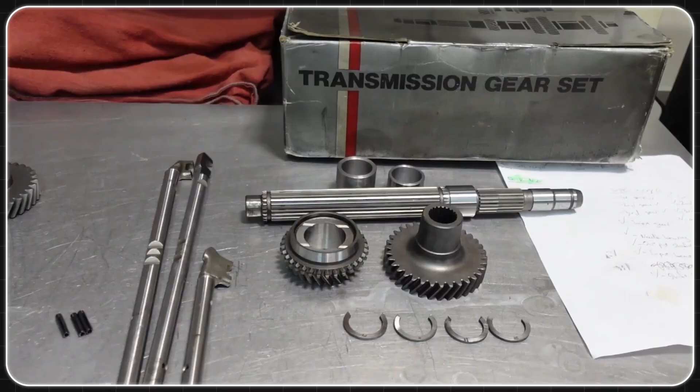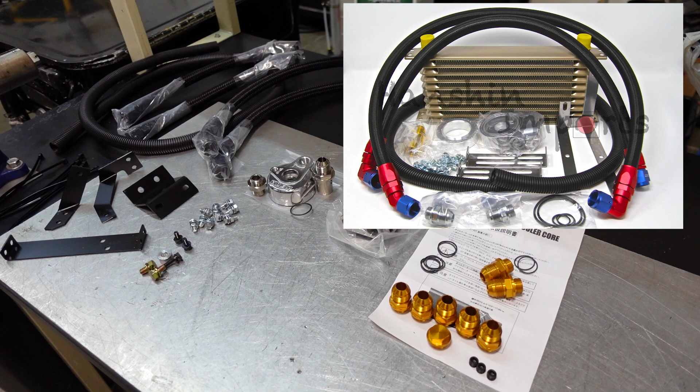Greddy oil cooler kit. This is an oil cooler and relocation kit. All the stuff that it comes with—I think it's only this and the HPI kit for the ECR33. This looks far more high quality. I think the ECR33 kit is not a relocation kit either, which you guys with RBs probably know.

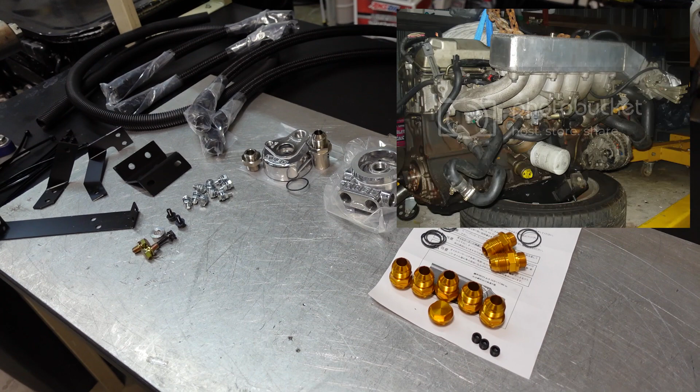25, 26, the oil filter is really terrible to get to and always makes a mess every time you take it off. Just some of the pieces.

I really would have liked to build a kit myself like I did for my AE86, but this is going to save a ton of time and money in the long run, with the R&D work all being done. Supposedly this should be drop-in, right?

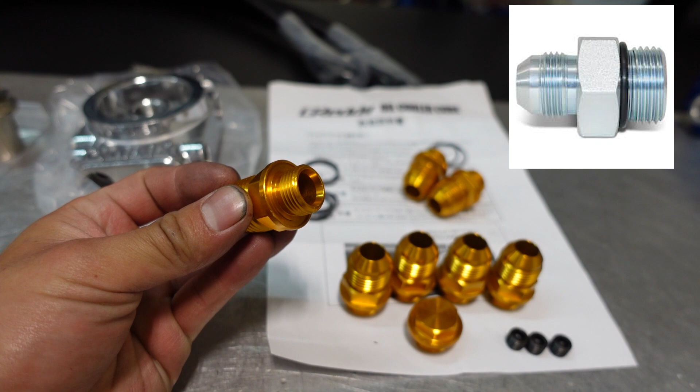Some of the reasons I wish I could have built this kit myself—I believe the fitment where they place the oil cooler core and the relocation stuff is pretty good, but I'm not 100% happy with these Greddy fittings. I wish these were just regular ORB fittings like we get in the US. I've had to replace these individually on customer cars, and it may be easier in Japan, but stateside these are not easy to get even from Greddy USA.

There's two 1/8 NPT fittings for sensor fittings on this guy, and one straight off of the block for another sensor fitting. In the future, I'm definitely going to run an oil temp sensor at least, off of the relocation. So I'm going to assemble a bunch of stuff, put all the fittings on, get this guy lubed and tightened up, and let's get this oil cooler on.

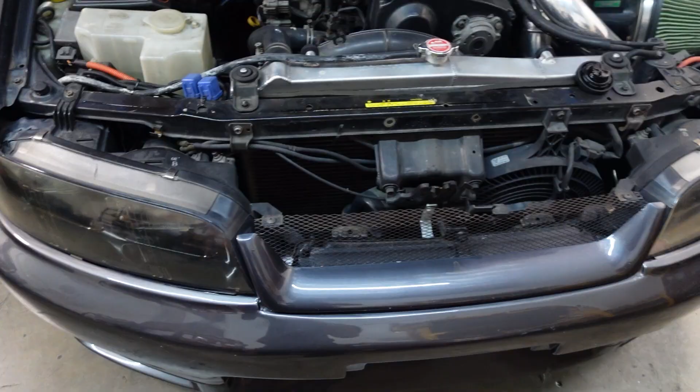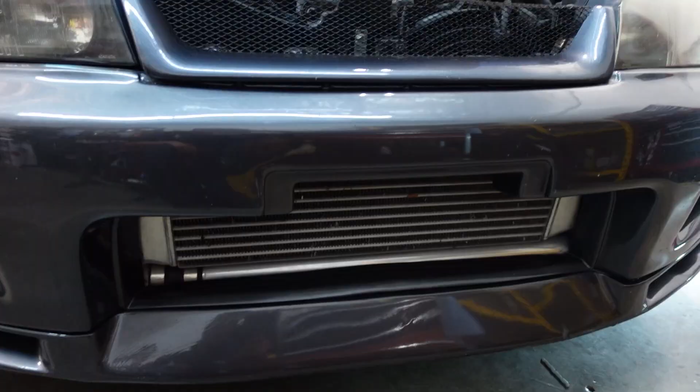Alright, got the diverter plate off. One thing I am a tad concerned about—this is obviously an ECR33, but with the GTR front on it. So is this bumper gonna get in the way? I mention that because I have the Blitz intercooler for this car, and this bumper actually got in the way on some parts for the intercooler pipes.

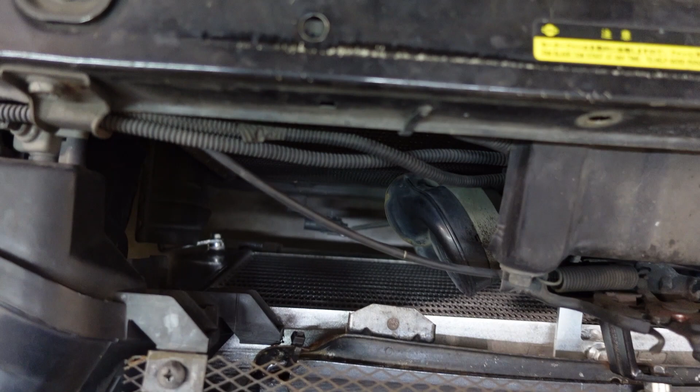So the oil cooler core is supposed to go right there. Hope that's not going to be my biggest holdup, being that this is a GTR front bumper and I have a Blitz intercooler. I'm really hoping the appropriate holes are still available and the appropriate real estate is still there, because I would like this to be a weekend project, not a whole week project. Please, please.

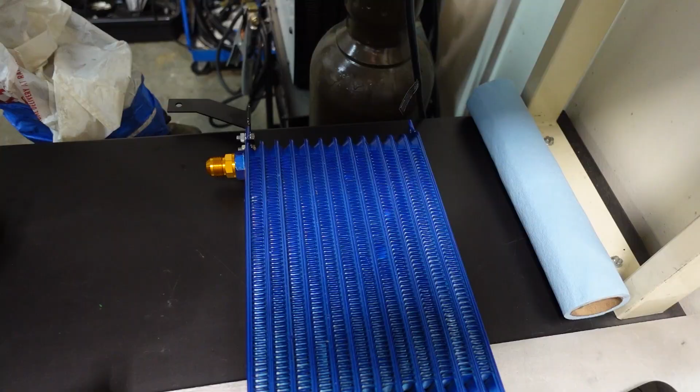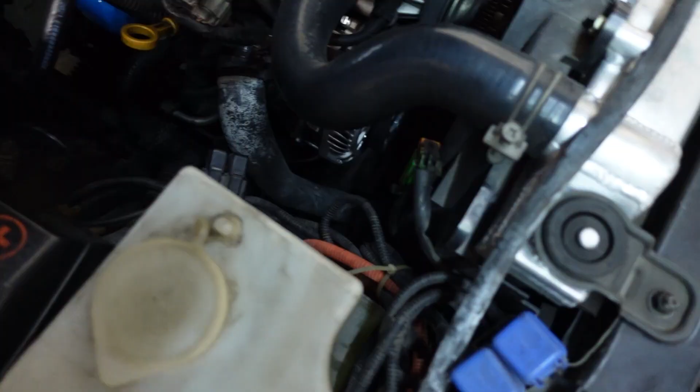Cool, got these guys assembled. Ran into a little bit of a problem. So the remote oil filter mount—guess where it mounts? Alright, so the Japanese instructions say right next to the washer tank. Yeah, the picture is totally not clear. Place oil block stay on the side of the washer tank. But I'm pretty sure it's right there at the bottom by the apron.

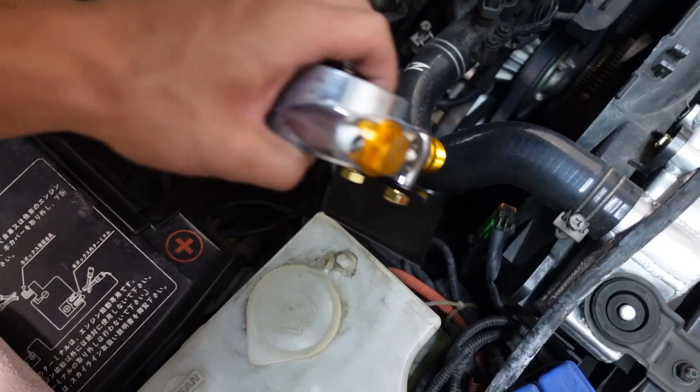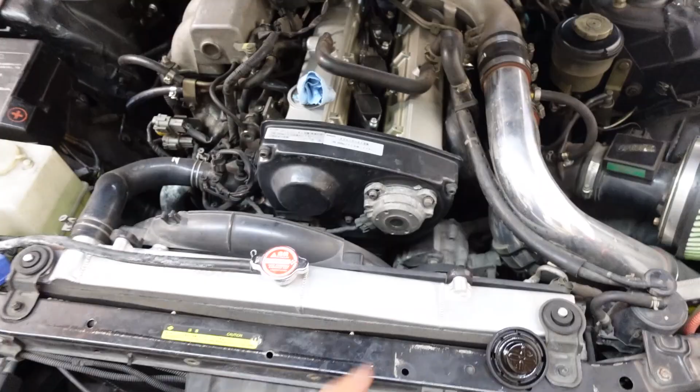But unfortunately, here's our problem. If you see right there, there's a big hole. Some front mount intercooler kits want you to cut that big hole so the intercooler pipe wraps around and goes down into there. No wonder the instructions say not compatible with the Greddy 24F intercooler kit, I think—the one that goes across.

So I'm pretty sure right there used to be two bolt holes where that remote mount goes. I think what I'm gonna do—you see there's an existing M6 bolt hole, and there's another one over there. I might have to bolt in a bar and then drill two holes right here, maybe nutsert something to be able to mount that remote mount. But yeah, not surprised running into drop-in issues with a modified car. You just gotta expect it.

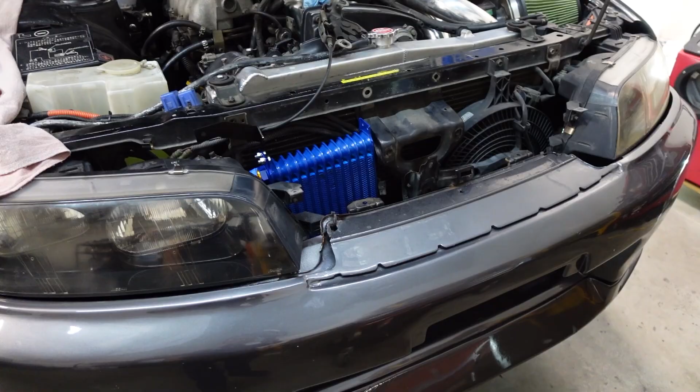Alright, so here we are, more problems. If you look at this, they actually want you to trim at the bottom, but I obviously don't need to—if you look down there, there's plenty of clearance. Getting ready to unbolt this guy and trim it, but if you see, that won't even line up close with that. These two guys are touching already.

I'm gonna call it a night, figure it out in the AM. Am I gonna make a bracket to extend this out so this lines up? Am I gonna just drill another hole here? For sure, I think I'm gonna have to trim this up, but I'm going to sleep on it for tonight and battle this guy tomorrow.

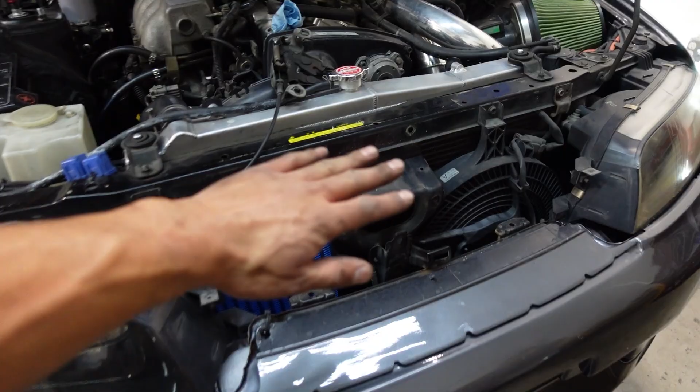But that blue core looks pretty cool so far. I'm debating if I want to continue to run that air diverter or not, just because this guy looks so pretty. Until tomorrow. Alright, we're back.

You know it's Saturday because I'm wearing a regular t-shirt.

So I did a little bit more research. Luckily, I found this blog post of a guy installing this kit on an R34 GTT.

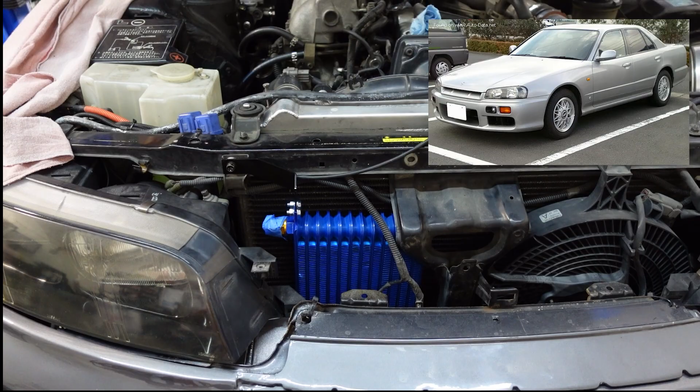Similar kit, a spacer goes here. This guy ends up sitting behind the center support. I have two horns here, and I'm pretty sure they're not going to be able to bolt into the same spot. So I might need to bend the brackets to find a place to put the horns now.

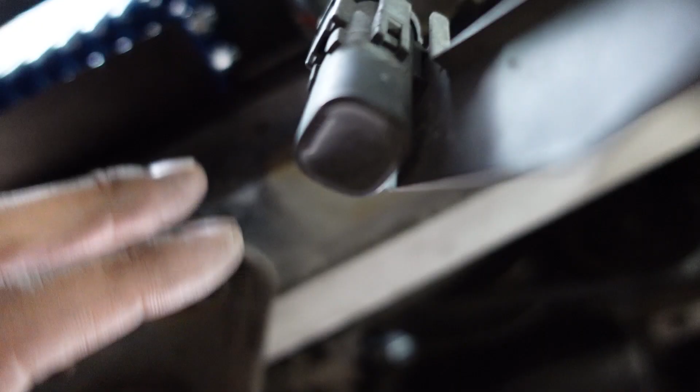So under the car, yeah, I ended up not having to slot this bottom part out for clearance for the oil cooler. All right, so we got that situation handled for now.

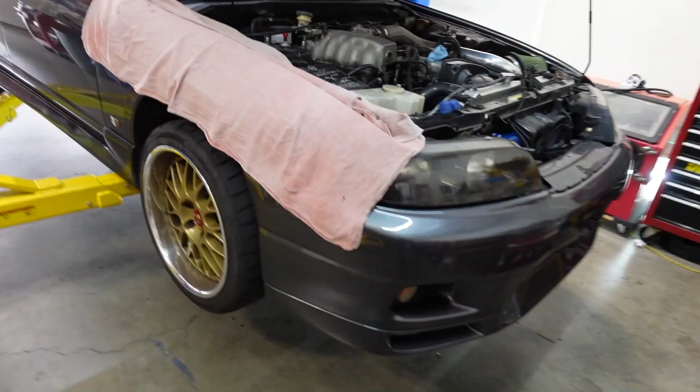The remote block off where that big hole is cut for the old front mount intercooler. I found this piece of metal at home. I think I'm gonna cut this up to fab a bracket for the new remote mount.

Yeah, that's one thing I miss about working a day job, pillaging the scrap metal bin. It was full of treasures for someone like me. Felt like the freaking Little Mermaid getting stuff like this.

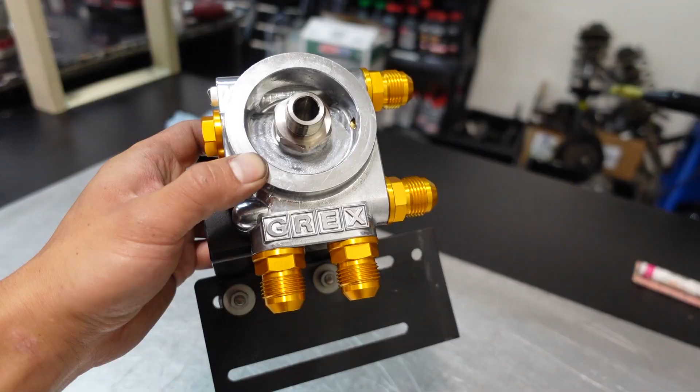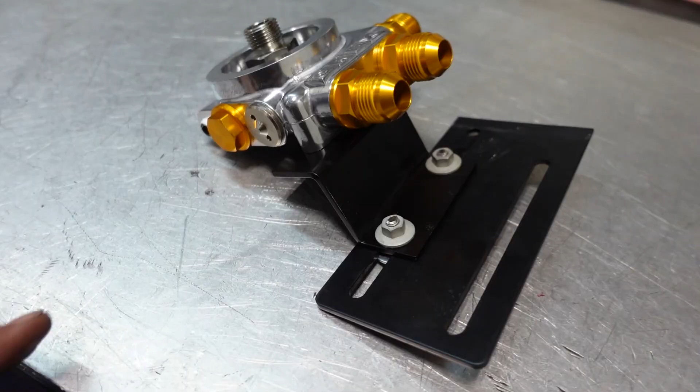All right, awesome. After a little fabrication work, this is what I came up with. That L bracket comes factory in the kit, but I'm gonna use that top rail to mount it to the body. And then I kind of got a rail system right here, so I can adjust in case I need to change the hose fitting position. But yeah, looks like this should work out.

Let's go get this guy installed. I had to source this hardware, but I'm gonna use the original hardware that came intended for this bracket to attach it to the car. Let's go do that right now. All right, awesome, got that guy bolted in there.

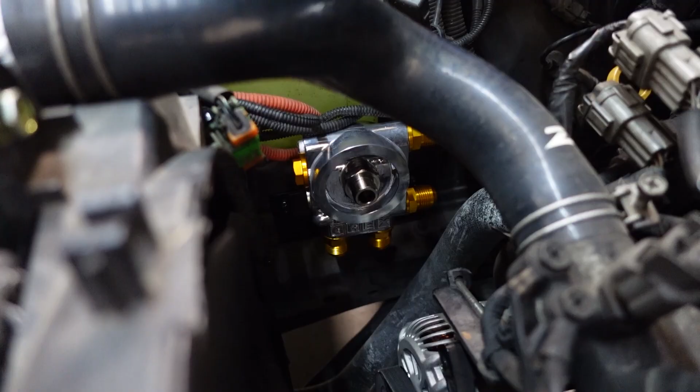I'm not sure where the original bolt holes were, so I'm not 100% on how far back or forward we need to put that guy. But luckily I have that slider for some adjustment. And you can see right there, we may be limited on how big an oil filter we can run.

I typically run the really big 300ZX filters, but I might have to run a shorter one with this. You can see I have a little bit of adjustment, not a whole bunch, because the bolt holes are going into where that intercooler hole went. But yeah, hopefully this should be enough. Like I said, I don't know where the original mounting holes for this guy are supposed to go, but we're pretty close. I think we can start plumbing the lines now.

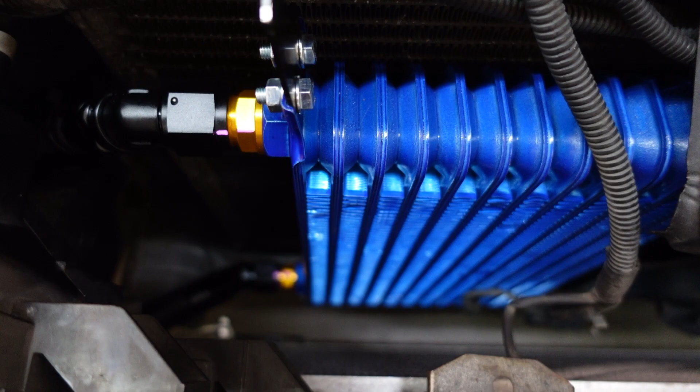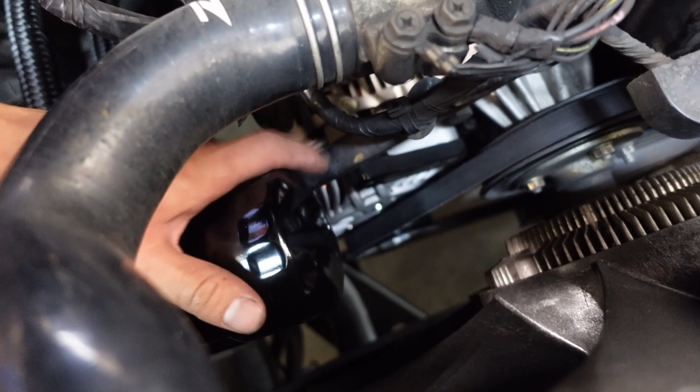All right, let's see where we're at. So got both lines on the cooler installed. I'll show you guys the line routing in a sec. Just want to show you, yeah, the 300ZX filter is monstrous, but too close to all this stuff, the alternator bracket, the belt, and also the fan blades for my comfort.

I'm actually gonna run a smaller filter instead. I got two more lines. Those are probably gonna be a bear to tighten onto the oil filter block off. Let me get those guys tightened down and then I'll show you the line routing.

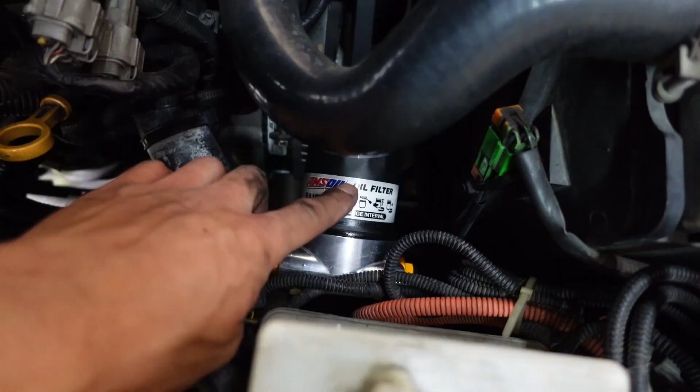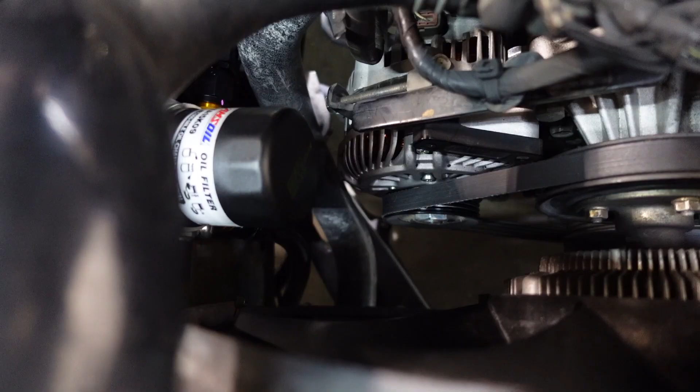So yeah, much shorter filter. I'm far more comfortable with the distance away from danger for that oil filter. And yeah, why don't we take a look under the car, check out the line routing. Looks pretty cool already with that blue cooler. We also got some provided tubing to keep those braided lines safe away from danger.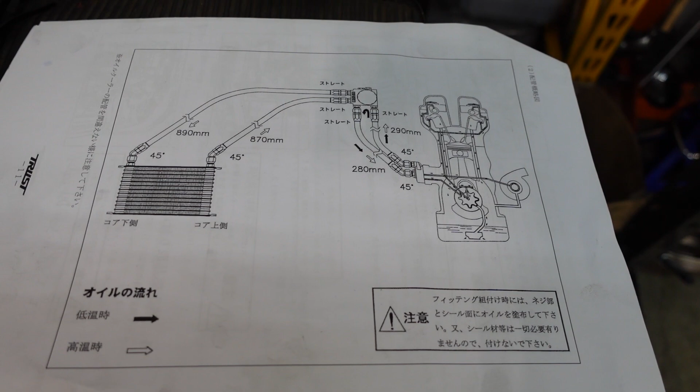And kudos to Greddy, this manual, despite being in all Japanese, was actually excellent. I especially appreciate this line routing, so there's basically zero room for error. I know I've installed other oil cooler kits before where it's like, is that the outlet? Is that the inlet? Is that the suction? And then you're looking through that thing with a flashlight trying to figure it out.

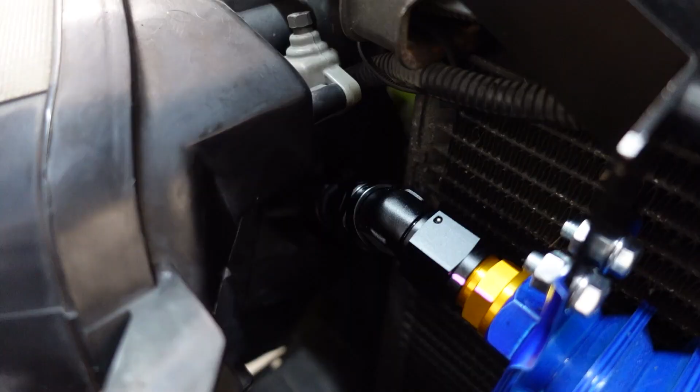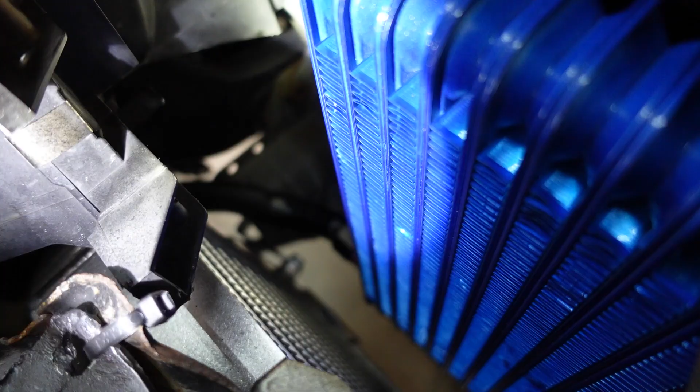All right, so before we lift the car up, our top line right here goes through this headlight assembly and then down into the inner fender well. Take a look, and then you guys can see our bottom line goes above the frame rail and into the fender well, and I'll show you guys where those two lines end up.

Got both our lines from the inner fender well. These will actually go under, tucked up in here, and around. The Greddy instructions actually tell you to cut this out, but this was already cut out on my car, so I imagine this car had this oil cooler kit at one point when it was in Japan.

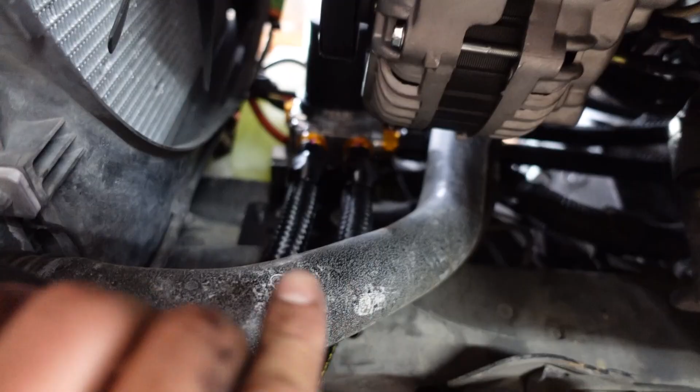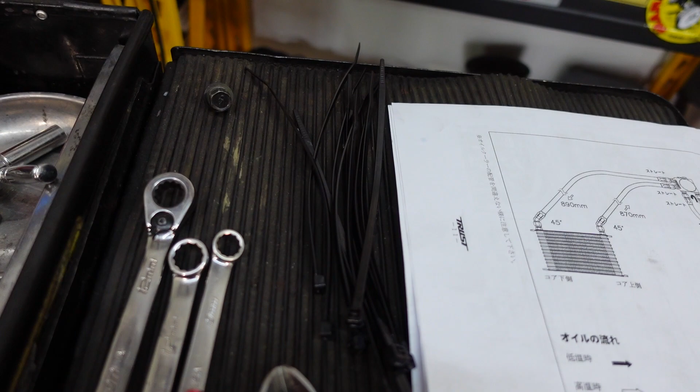We're gonna go up over our tension rod brace, and you can see right there it ends up at our relocation. I'm gonna get some of that convoluted tubing to protect some of these guys. Included in this kit is this handful of zip ties too. Once I get those lines situated, I'm gonna go ahead and prime the oiling system.

Take the fuel pump fuse out to disable the fuel pump, crank the engine for 10 seconds. I'm gonna do that maybe 2 or 3 times to prime the oil system, get oil into the cooler unit and then all the lines. Recheck the oil level, I'm probably gonna have to top off. Also at the same time, check all the points of connection. Hopefully, cross your fingers, there's no leaks. And then after that, I can go ahead and start the car and double check for leaks while it's running.

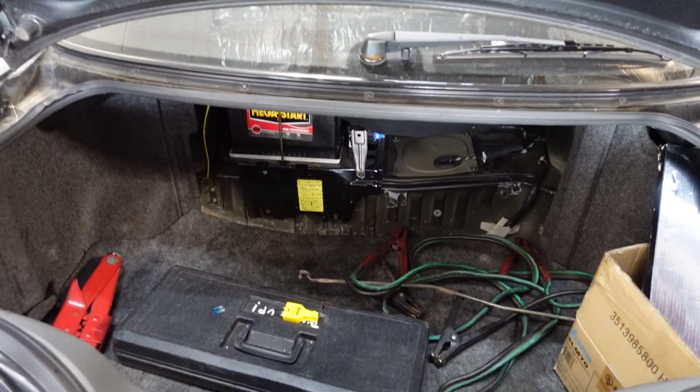In this trunk, got my fuel pump fuse removed. I primed this guy already a few times, but double checking the oil level, it was still full, so I imagine there's a ton of volume of oil to move. I'll just show you guys, I'm gonna prime it one more time. We can count to 10 seconds.

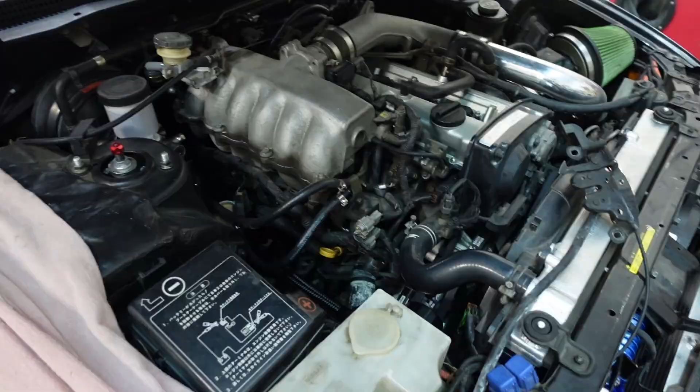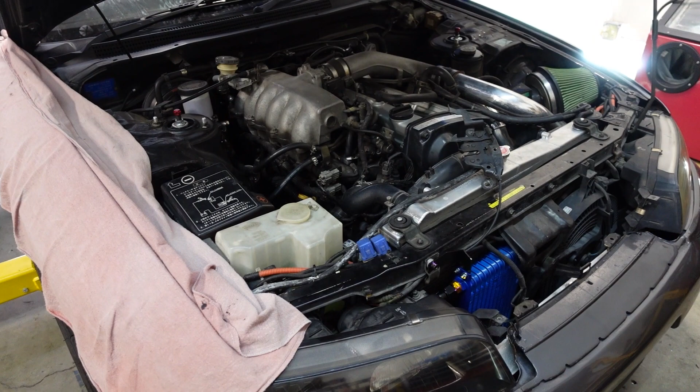I'm gonna go ahead and start it, run outside and check for leaks. Now would be a great time if you had a friend to tell them to stand out here and yell at you to shut it off in case there's a problem. Alright, so I topped off about half a quart extra. Let's cross our fingers, get this guy started. Pray for no leaks, please.

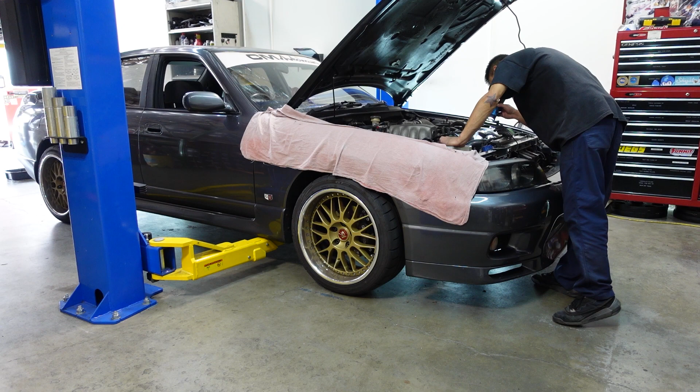Alright, well, so far so good. Let that thing run for a little bit. Checked all the fittings and mounts for leaks. So far we're alright. I'm actually going to continue to drive it and monitor the lines, because in some instances AN fittings kind of gotta settle in the lines and everything as the engine moves. Although things are good now, you still want to be on the cautious side and continue to monitor the lines. You absolutely do not want a pressure oil leak, that'll ruin the engine and ruin your day. But yeah, so far successful install.

Next step is to get an oil temp sensor and gauge on the car, so when we do a track day or canyon driving, we can monitor the oil temps.

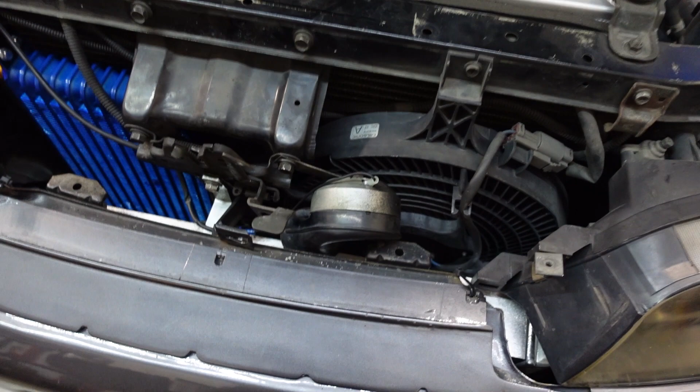Alright, buttoning up the car, last few issues to take care of. I don't know if this was because of the GTR front conversion, but my two horns were bolted and facing this way. They're not going to fit with the oil cooler anymore, nor did I want to put them in the same spot and block the airflow to the oil cooler. Just temporary, I have this guy bolted up to the hood latch, and then I made this wire extension.

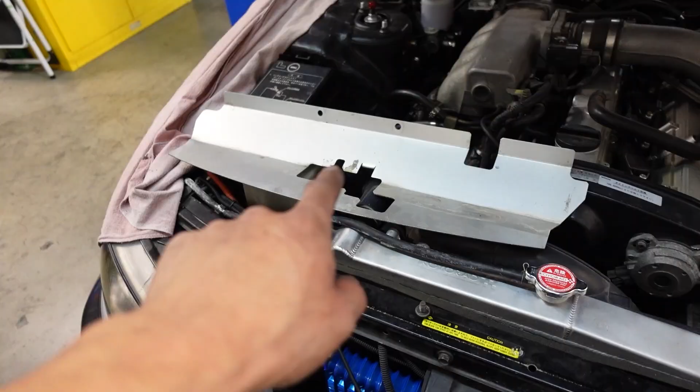The other thing, this air diverter, this guy's gonna get in the way of it, so I gotta think about how I want to modify this if I want to continue to run this. I think some people argue about the efficiency of this, they say that it's better to run without it. Please, someone way more knowledgeable, leave it in the comments below if this is efficient or if this is just a waste. So I'm just gonna run it without for now until I figure out this situation.

It's also so I can flex on people, right? But out here in the Bay Area, distracted driving is rampant and ridiculous. So all my cars, old school or not, I make sure all my horns are working and as loud as possible, because I consider horns a safety device out here. Again, the distracted driving out here is ridiculous.